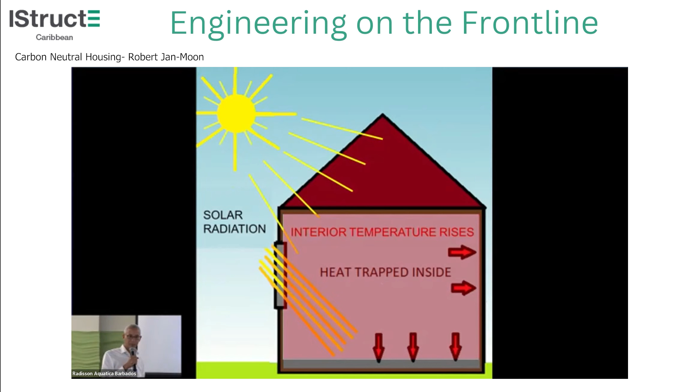So when I designed my house, I had a lot of discussions with the architect on ventilation, because the first step is to create a stream of air flowing through the house the whole day to keep it cool. The house was positioned in the direction of the wind.

On the east side there's an air intake with special louvers taking air in, and it flows through the living room and dining room, with an air escape at the other end, in order to make the living and dining room a pleasant space to be.

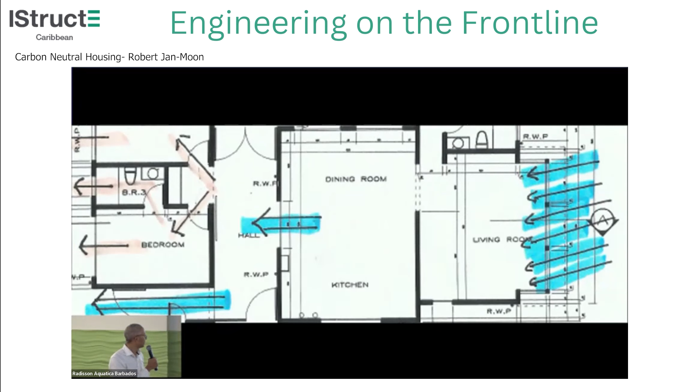I'll get back on it. Here you see some of the air intake louvers on the wind side of the house. They can be closed and they have insect screens, plus some more details. I'm sure in the Eastern Caribbean you're better than me at this, because you work a lot with louvers.

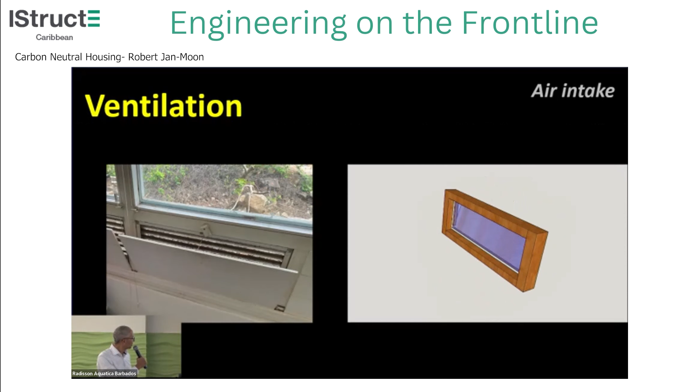And then in the hall - you see it turning - it has a sunscreen and an opening.

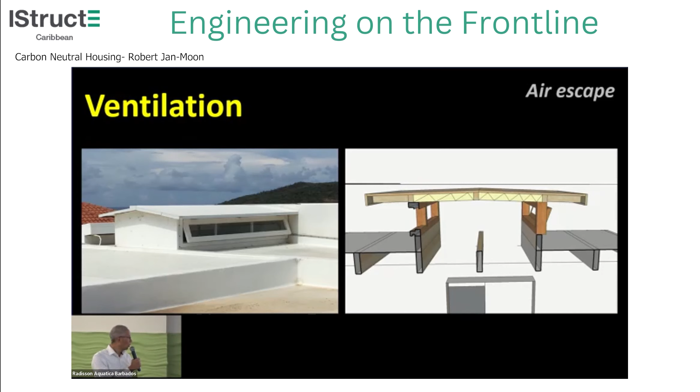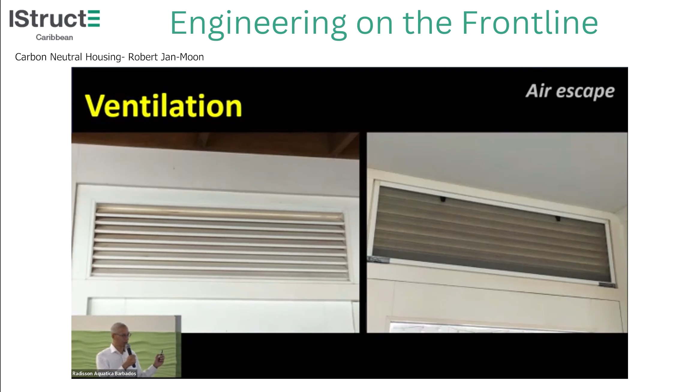On the top of the roof, there's an air escape that sucks the hot air out, so there's a roof window designed on top, and you can close it if needed. That's the ventilation concept. At some other places in the house, there are also louvers that are permanently open - I only have special sheets to close them for hurricanes.

The other building measure to prevent heat from accumulating in the house is to have a white roof that reflects heat. You can paint the roof white, or use more specific materials like this TPO - a reflective coating of 2 millimeters that's very effective at keeping the heat out. So have the roofs white.

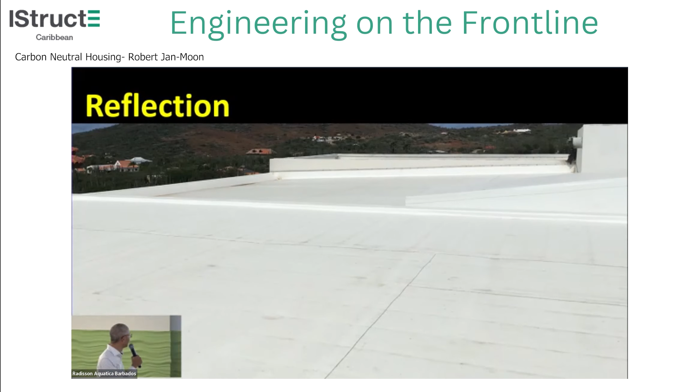But we're going on - insulation. Here we have a normal brick, and then we're putting a sheet of foam about 5 centimeters against the brick, and then plastering over it, so you don't see the foam anymore, but it's embedded in the wall. In this case it's on the outside - it's also possible to do it on the inside. You can have a whole debate about inside versus outside, but I've only done outside, and it has more benefits.

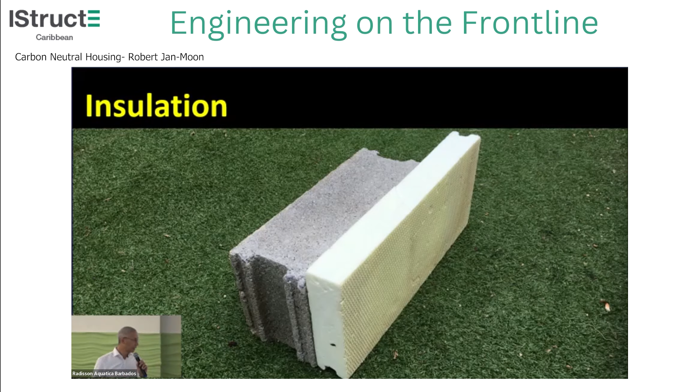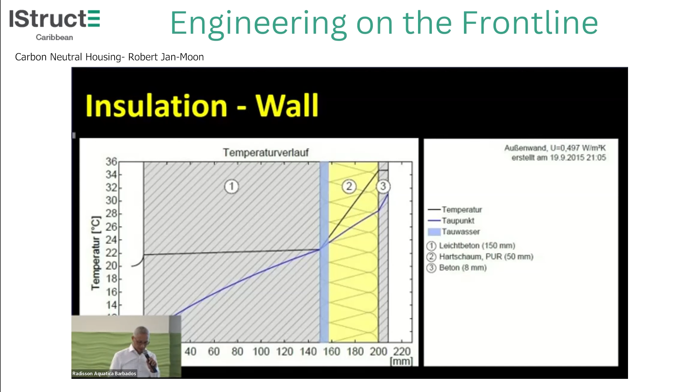But we're not stopping, we're going on. The next step is to have insulation in the roof too, because a lot of energy penetrates through the roof. So we put a sheet of foam underneath the TPO, and that all goes on the plywood - actually the plywood goes in between, in order to have heat also blocked from the top.

So by now the brick is totally encapsulated - from the side, from the top, from all sides, to prevent heat from entering. That's how we keep the building cool. Actually, the insulation is only on the west side and south side, where the sun is highest. For cost savings I didn't do it all around, but it's very effective.

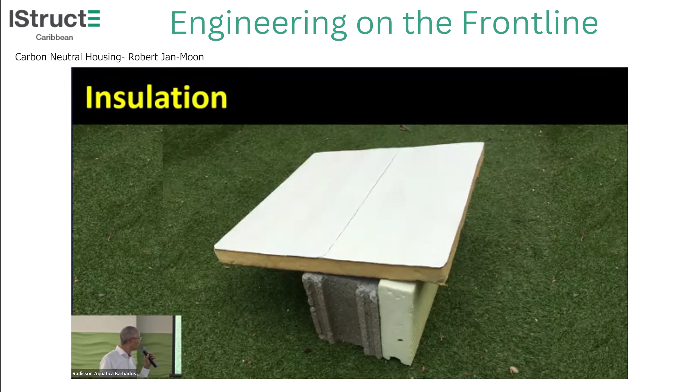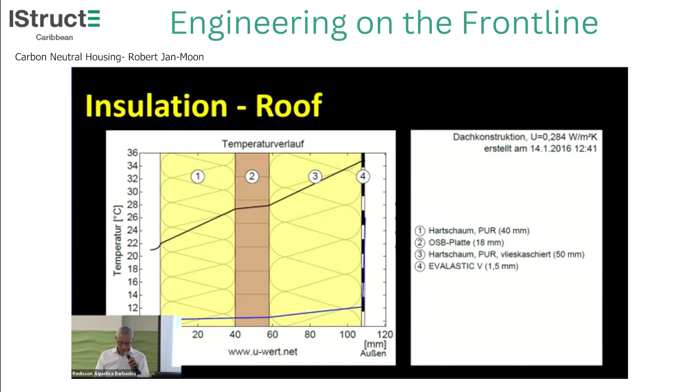Here you see the insulation profile of the roof. You should turn your head like this - that's the top, with the foam layer and the plywood, and then there's also another layer underneath the plywood of extra insulation, because I demanded a very high U value - very low, very high R value - for the roof in the energy discussions.

Double glazing. So all of the windows that are made from glass have double glass, which is more effective at keeping heat out.

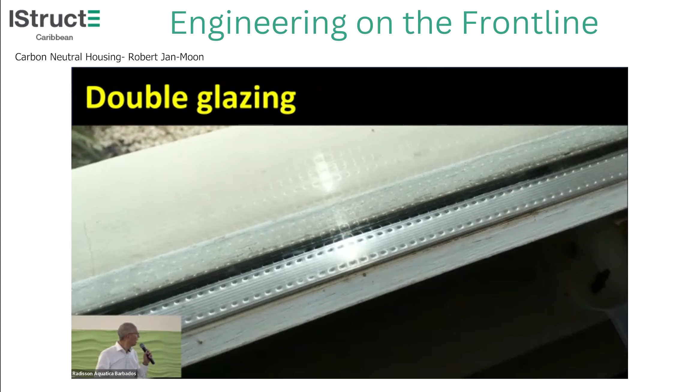All right, so after having done all of this, and these are all building energy efficiency measures, we're going to look at the energy side of it. Because we're doing this to save energy, right? That's the whole purpose. And also to create a more comfortable indoor climate. Let's not forget that, and a more healthy indoor climate.

So let's look first at the air-conditioned rooms, and then we look at the total house. The air-conditioned rooms are very important because they are the main driver of the energy consumption of the house. So let's see.

This is from my home energy management system. You see the master bedroom. And what is happening? We have an inverter airco. When we turn on the air conditioning at 7 o'clock or 8 o'clock in the evening, it goes to 400 watts. But as it cools the room, very soon the energy that it uses starts dropping, because it's an inverter airco and it has a variable power consumption. So the inverter is switching back, switching back. And then by the end of the night, 3 o'clock, 4 o'clock, 5 o'clock, it's hardly using energy.

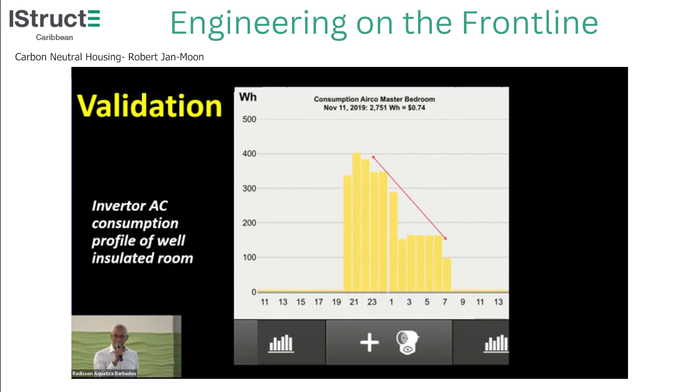It's only 150 watts. And this is, if I may say, a big bedroom of like 40 square meters, and the airco is only 12,000 BTU. So this, for me, is really amazing.

And if it didn't have the insulation, the cold would dissipate, and it's assumed that the power would be the same throughout the night, so it would be a flat profile. So this whole block here is the energy saved. And here you see really the gain that you're getting off of this, right? So we're saving here roughly 25% of energy every night.

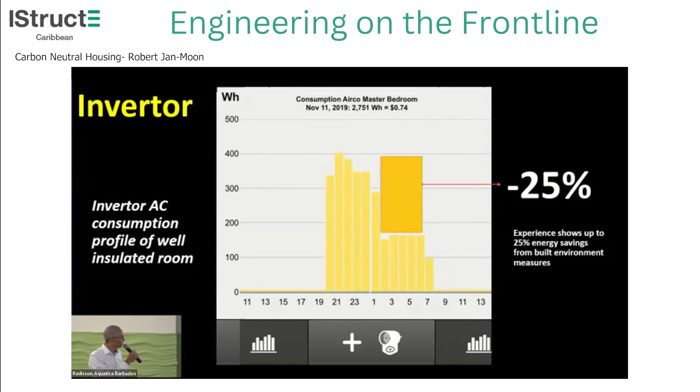Now, in my former capacity, I did some extra work, and a former colleague of mine and I modeled this room. So here you see a simulation of the same room, and I'm asking you to look at the bottom side of it, because this is the energy profile. The top line with dots is the room without insulation, and the one with insulation is below it with the blue straight line. And you see that due to the insulation, far less energy is used.

And the same holds for the rest of the morning, in the early morning hours. And that shows a savings of about 30% per night. So it's quite a good correlation with the practical measurement.

And just for those interested, I don't want to drag on too long, but here you see what happens with the temperature. The black is the outdoor temperature and the blues are the indoors. So if there's no insulation, in the day it becomes more hot inside than outside. The indoor temperature goes higher than the outside temperature. But due to the insulation, it keeps the cool and keeps the heat out, and inside it's cooler than outside.

So that's, again, the comfort even during daytime, without the airco being on, still having the effect of the coolness being captured in the walls, because the cement absorbs the cool. And I must say, when you come home at 5 o'clock, the room is still very cool, still 27 degrees from the previous night. So for me, it's really amazing.

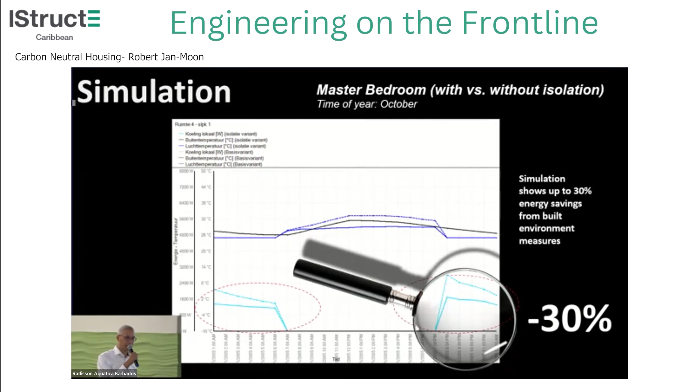All right, then to move on. Oh, sorry, I also looked at another house that has nothing of this and has old airco systems, right? That's a bit shocking, and this is not scientific, because it's just a few measurements.

But I found an airco that's using 1700 watts continuously the whole night. So then they are up here, and I'm down here about my 25%, but they are up here. So you can see how dramatically different it is when you go to the old technology. In this case, we're only using 3 kilowatt hours per night. In this case, you would be using 12 kilowatt hours per night.

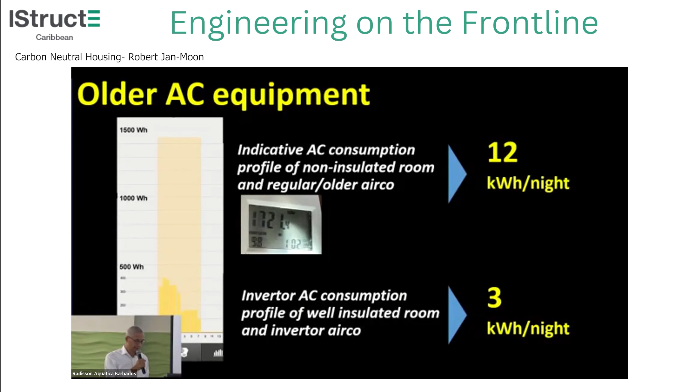And this is kind of an easy cost savings graph, because if you use 3 kilowatt hours per night and it's a $0.32 energy rate in Barbados, it's like $1 per night US dollars, right? And then you're here. But if you're up here, then you're having the fourfold. So you can think of savings, well, depending on the situation of the reference building that you use, but the savings can range between $350 and $1,000 per year. And that helps, of course, to recover the investments in the insulation materials and the labor to apply them.

All right, we're still good on time, because the next debate in the family came when, during the hurricane season, it's very hot, no wind, and the spouse and the children said the living room is still too hot.

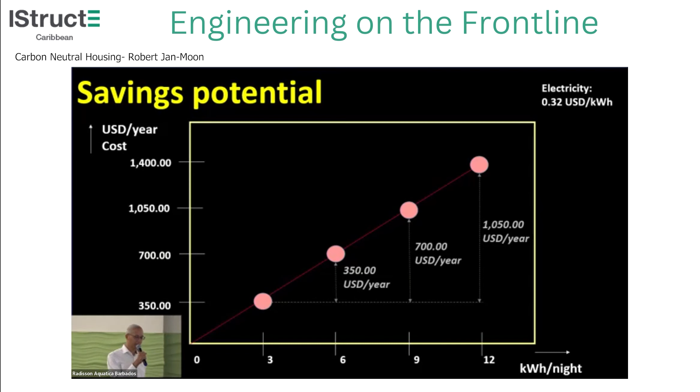And we want to have air conditioning in the living room. Then I thought, oh no, they're going to wreck my energy case, because I'm trying to go to energy efficiency, lower consumption, those things. And now they want more consumption, and it's a whole space to cool. So I told them, what shall we do?

Actually, the architect told me the best is to put ceiling fans, because that will create the ventilation and has very low energy consumption. But the children and so on said no, we want the air conditioning. Okay, so I thought, I'm gonna calculate it first.

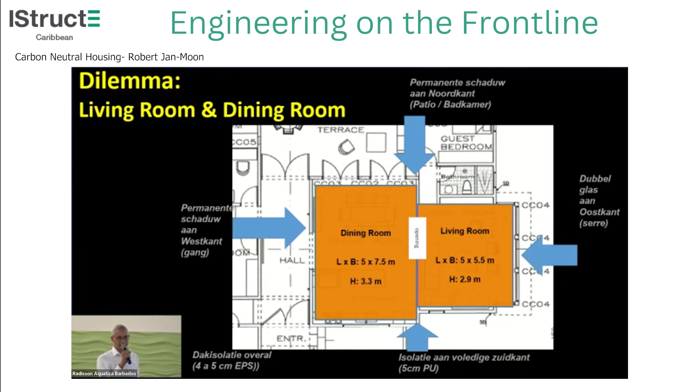So we simulated the house in the energy tool, and then came a debate, because there are people who are saying it may be cheaper, if you have the air conditioning, to leave it on 24 hours. Because it doesn't have to deal with the inertia of the day and to recool the walls and so on. So that's a famous energy problem in air conditioning.

And in the simulation it was very interesting, because we're looking here at the energy consumption part. This is the 24-hour profile. This is only the daytime profile, when it has to cool the house, and then it slowly drops. And this is only nighttime.

So I'm here expressing units of energy, because it's a very complex energy unit. I'm not going to bother you with that. But it's just the integral, the surface below the blue line. That's what we're counting. And it turned out in the simulation that the 24 hours was still using most of the energy. I found it very interesting.

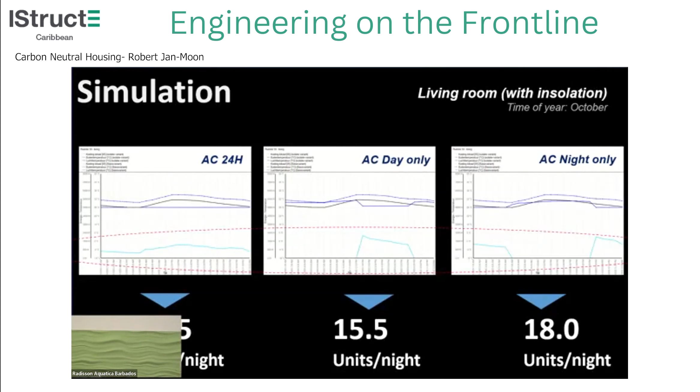And turning the AC on in daytime only was still having less consumption. So then I said, okay, if we're only going to do it in daytime, then we will install the AC. And the room has 2 AC positions, but I said we're going to start with only one AC, we're going to put 24,000 BTU and see how it goes.

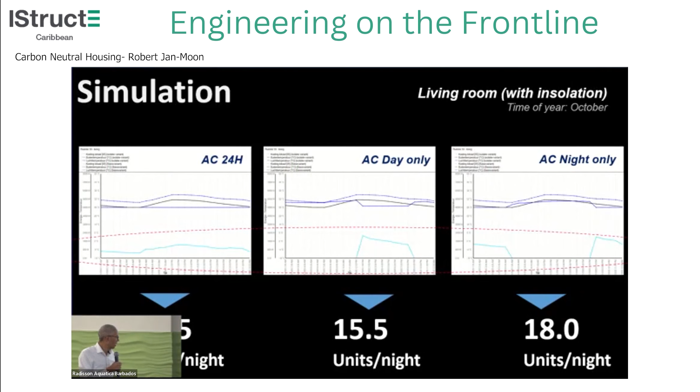All right, now what you see is that the 24-hour profile, this is an experiment leaving the AC on for 24 hours, has the highest consumption. It has a low consumption in the night, but as soon as it's morning, with the sun coming up and with people opening doors, closing doors, air escaping, the AC has to start working hard again to keep the room at a set temperature. And that's especially midday when it peaks, because then it's the hottest and it's when most people are coming in and out from school, from work, and so on.

The other profiles are a bit strange. Oh, sorry. Because it's starting only at 1 o'clock, because then the school is out. So we're not turning it on at 7, but at 1 o'clock. And you see that this one is using 15 kilowatt hours, this one is using 11 kilowatt hours. So the consumption in the day only is still most favorable, especially if we turn it off earlier. In this case, it stayed on till midnight, not really needed.

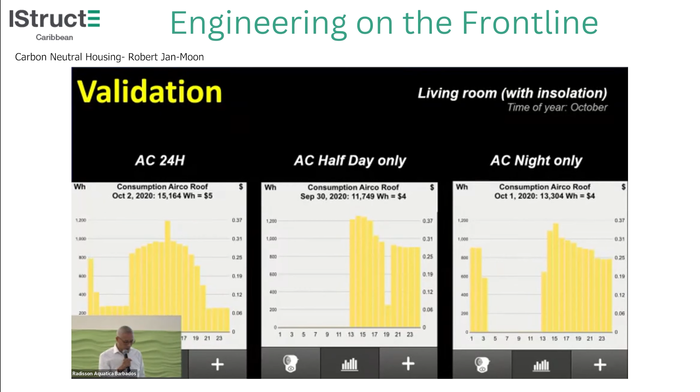So that convinced me that it was still an acceptable move to have this AC installed. Okay, just in keeping with time, let's look now at what's happening with the total house, right? Because it's not only, it's 2 bedrooms, child bedroom, master bedroom, the living room project, oh no.

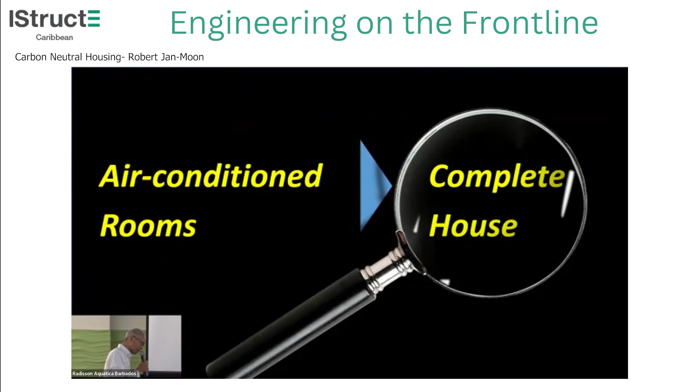What is the energy company telling me? The energy company is telling me, and by the way, the house was built in 2016, so here you see the data as of 2018. This was the house before we had the living room air conditioning and after the living room AC was installed, because you see it has an impact.

But it was using about 500 kilowatt hours per month. I'm not sure if you're familiar with energy units on your bill, but it's relatively low, because in Aruba, the average consumption is 750, and for bigger homes, it's over 1,000. And even after the living room AC was installed, the average was still under 700 kilowatt hours. Meaning that the energy bill, at the tariffs before the recent increases due to oil prices now, we're still paying about 200 guilders, let's say $100 US dollars per month, which is, I believe, not a lot for a house like this.

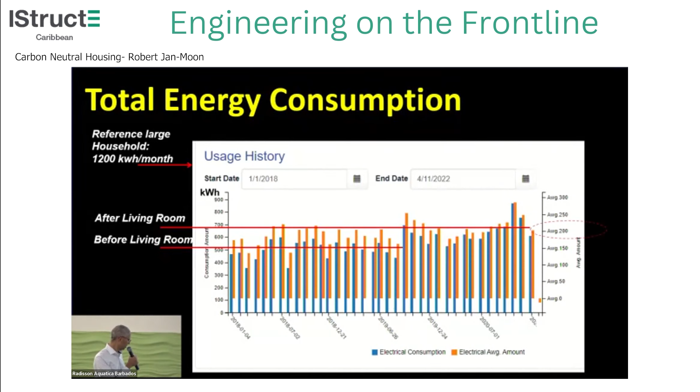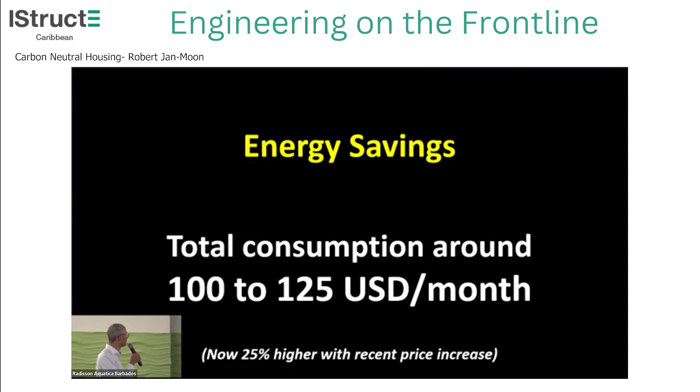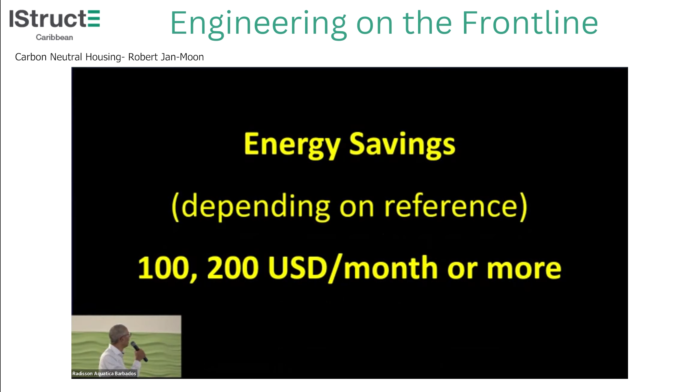About 30 kilowatt hours per square meter, because the house is like 280 square meters. So the total consumption was about 100 to 125 US dollars per month. Now the savings depend on your reference, but people with similar houses pay much more, so I'd say the savings are at least 100 or 200 US dollars per month. Let's remember that figure, because we're going to add savings. So let's say from here we're getting $150 per month in savings. That's on the energy side, after energy efficiency measures.

But the Paris Agreement, you know, in Egypt they're talking about net zero 2050, those things. We want to push up the ambition, we want to push for carbon neutral. So after having reduced all of the energy use, I started looking into how can I produce my own energy to fulfill what I'm still needing.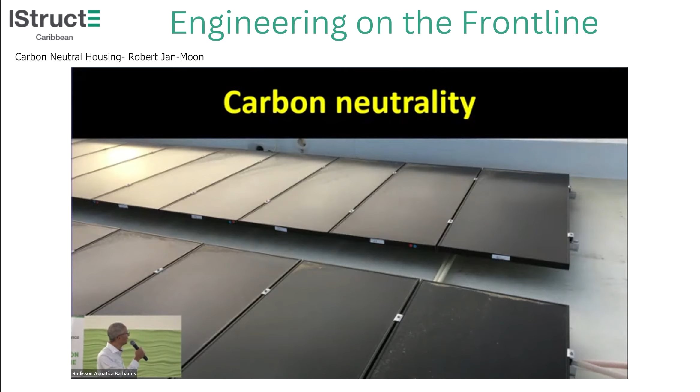So I invested in the solar system, which came in 2 phases, total 8.5 kilowatts. It's below the regulatory limit of 10 kilowatts to produce your own energy. After we installed this, we had to get the system up and running, because it had some small issues. But then in May 2021, after having it fully installed, we got to the point that the solar production became higher than the consumption of the house. So we're now totally energy neutral.

So that means we're now producing more energy than needed, and that's one of the goals towards becoming net zero.

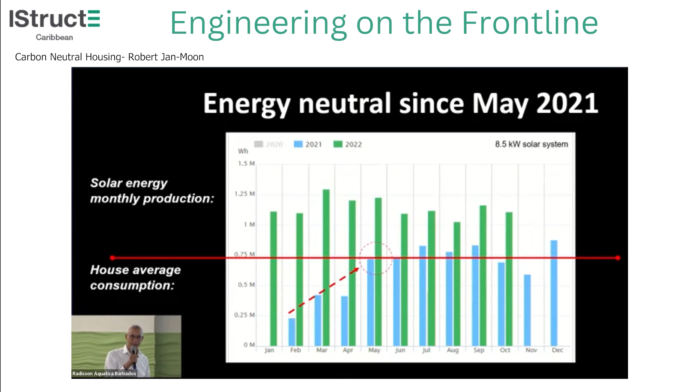And that leads me to the fundamental question: why would you wait 30 years to do something that you can do today? I'm not going to wait 30 years, that's one of my key points. We can do it today, as long as you follow the right steps and make the right decisions. And that's something for everyone to think about. What can you do? What can we all do to contribute?

As you saw, there was a surplus in the energy. Having this extra energy, the buyback rate in Aruba is quite favorable. This 85% is one of the most favorable rates in Aruba. So I'm getting money back from the energy company. But still thinking on the Paris Agreement and carbon neutral, net zero - by the way, carbon neutral is from the Kyoto Protocol, net zero is from the Paris Agreement.

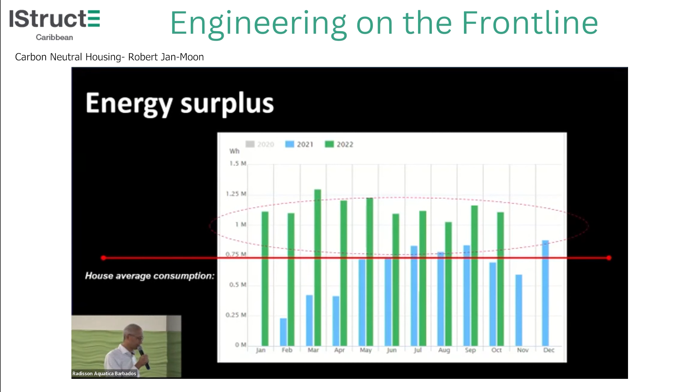But we're thinking about the cars, the fuel. So the next step was to get into electric vehicles. I have the Nissan Leaf, and some very wealthy individual gave me a very old electric car for free, an Ion, the Mitsubishi i-MiEV. Now we're charging these cars on the surplus energy, meaning we're also reducing the transport emissions, in order to reduce the transportation footprint.

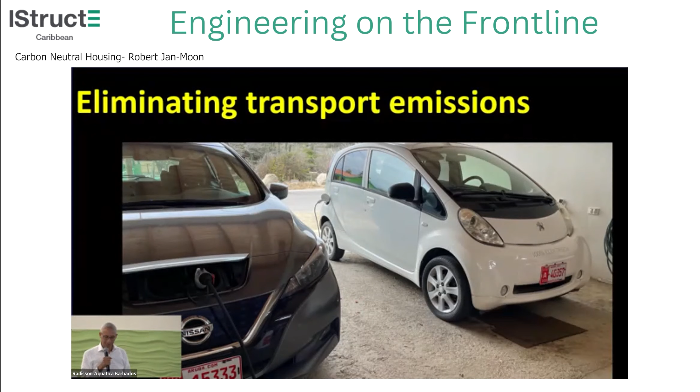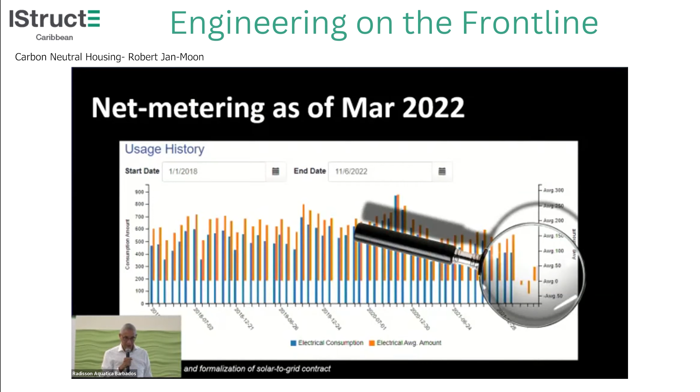You see the proof here, the net metering, because at the end of the graph we're not paying anything anymore, only getting money back, and we've also eliminated the transport emissions. Fuel savings estimated at $250 per month, together with the energy savings of $150, we're now already at $400 per month in savings. That basically closes the energy part of it.

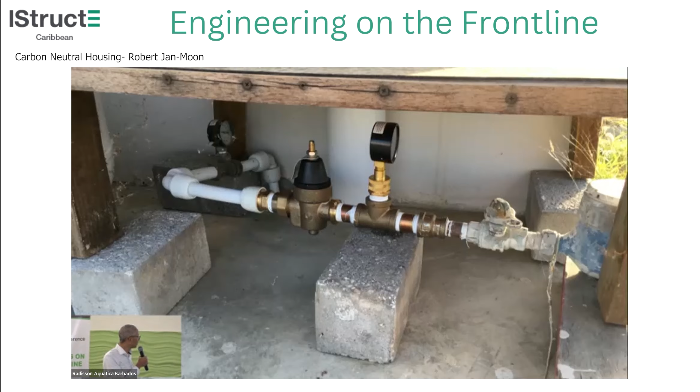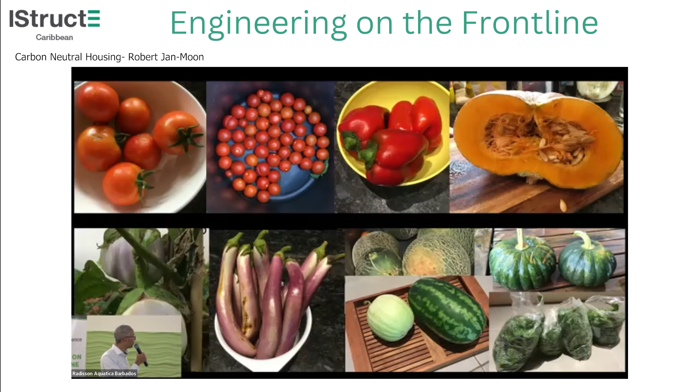And just to wrap it up, some snapshots, because Mr. Emmanuel also spoke about other areas - waste, water, those things. You can do more. You can install a water pressure regulator to save water. You can do garden irrigation with water reuse instead of using water from the water company. You can produce your own food and crops, that's the pumpkin, and composting also.

So the total savings in food are like $200 a month. In water, even excluding irrigation, also $25. So in total, I think by now I'm saving more than $500 per month in terms of living more affordably.

And ladies and gentlemen, that is really my main message. What we want to do is live zero emission, live at a lower cost, and live with more comfort, because let's not forget comfort, which is the main human driver.